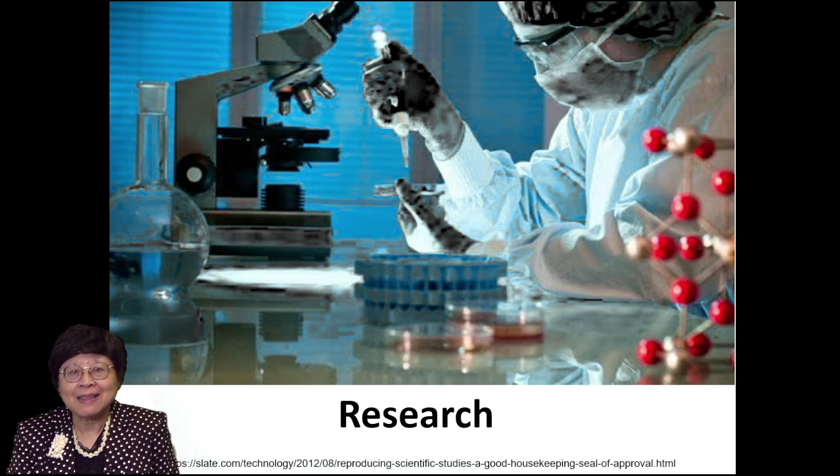I was also the very first woman engineering graduate. I got interested in integrated circuits, and I studied under Professor Carver Mead, the father of very large-scale integrated circuits. However, I did research under Professor Duwez, the father of amorphous metals, and that was my very first taste of research.

Research is not merely finding out existing knowledge, but creating knowledge so as to advance human civilization. Materials in particular can be very pretty, with a lot of applications such as electronics, aerospace, biomedical, as well as construction sectors. Materials actually constitute the foundation of any technology, electronics, aerospace, automobile, and whatnot. Materials also mark the history of human civilization, starting with the Stone Age, Bronze Age, Iron Age.

It's really exciting to be driving on the road of human civilization - not in the back seat, but in the driver's seat. After graduation from Caltech, I moved on to MIT for my graduate work, and I got interested in graphite.

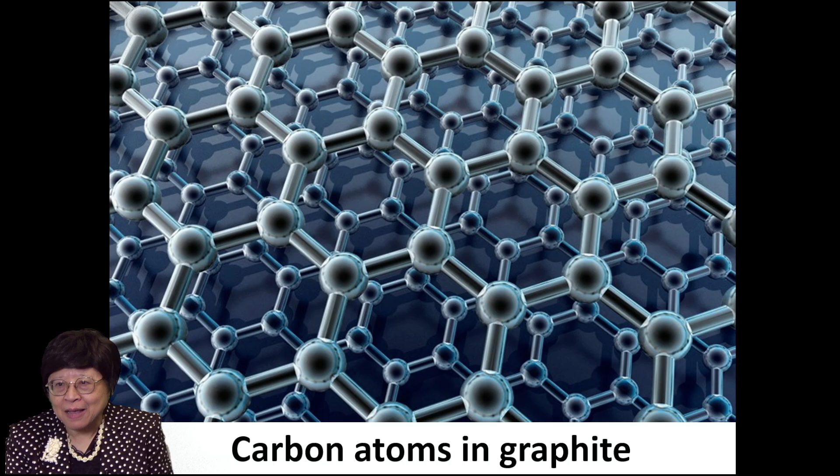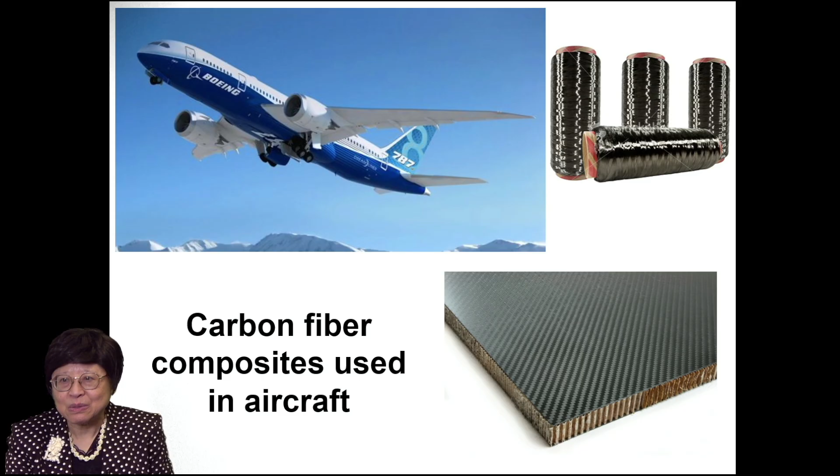There's a beautiful arrangement of carbon atoms in graphite, with applications in batteries and in aerospace, such as carbon fiber. Carbon fiber composites are widely used for aircraft because they are lightweight as well as strong. I studied under Professor Millie Dresselhaus, a very prominent carbon scientist.

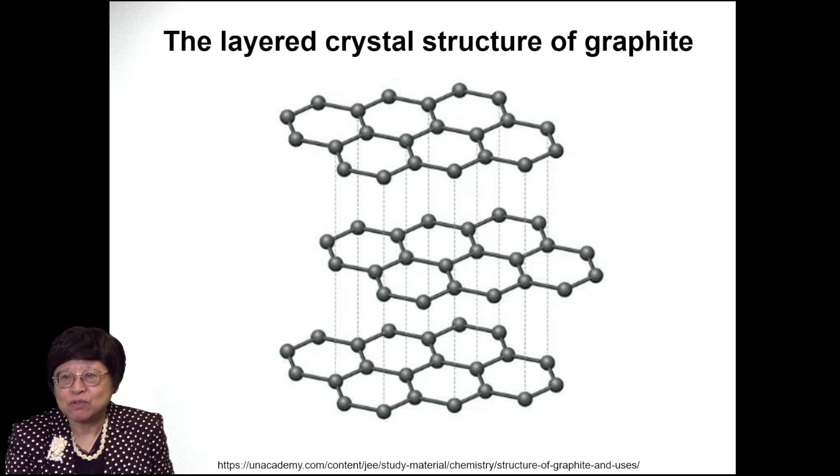She was a solid-state physicist, and we decided to study the reaction of graphite with certain strong chemicals so that the strong chemicals go in between the graphite layers, making a sandwich compound called an intercalation compound. In so doing, the graphite becomes a metal. It's very interesting, changing graphite to a metal through this process, which involves charge transfer.

I continued this line of research for 10 more years after graduation from MIT. I gradually saw the decline of my field of expertise because the applications did not quite work out at the time. So I decided to leave my field of expertise, but what to do? That's the big question. I was forced to think out of the box and leave my comfort zone.

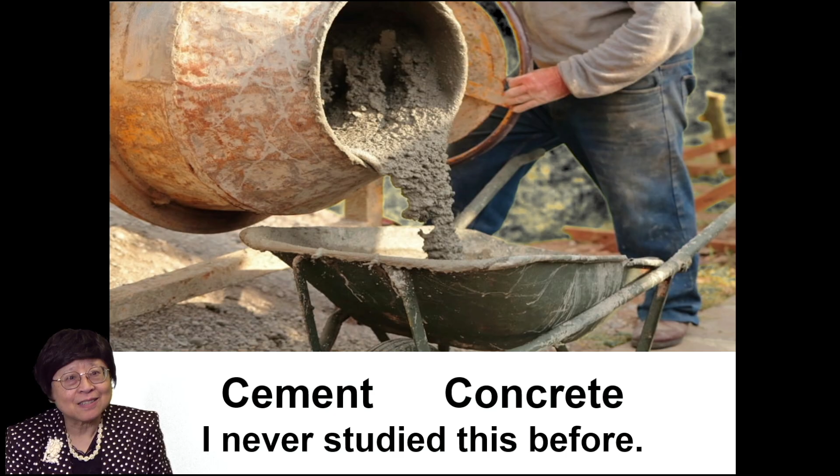I got interested in cement and concrete, something I never studied before. Because of my electrical background, I started studying concrete as if it's an electronic material. And thus, I invented smart concrete, which contains a little bit of short carbon fiber, which alters the electronic properties.

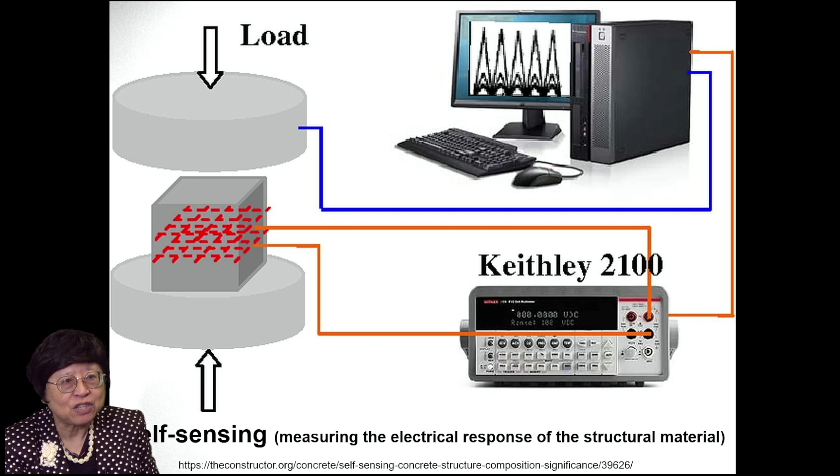The idea is that if you apply a load to the smart concrete, the electrical resistance changes. So by measuring the resistance, you can tell how much is the deformation, also the damage. This is known as self-sensing - the structural material sensing its own condition without the need for any sensor incorporation. This makes possible real-time monitoring, which is better than occasional monitoring.

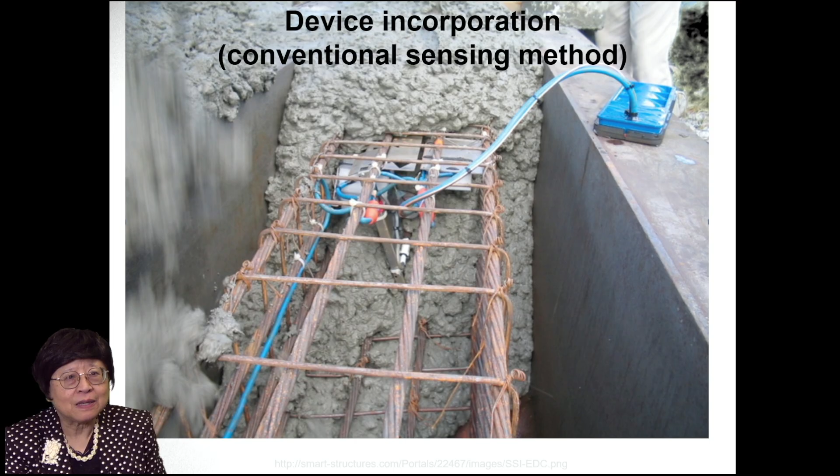Now, if one embeds a device like a sensor into concrete, it looks something like this. And if the device malfunctions, it'd be pretty hard to repair that. But without device incorporation, we have low cost, high durability, large sensing volume, and the mechanical performance not being compromised.

There are numerous applications, such as building intruder detection - that is, detecting the intruder because the intruder weighs something, so no camera is needed. Also weighing trucks as they move, and traffic monitoring, again because the vehicles weigh something. Autonomous vehicles need a lot of sensing, not just cameras and radars, but the infrastructure being able to help the sensing would be very nice.

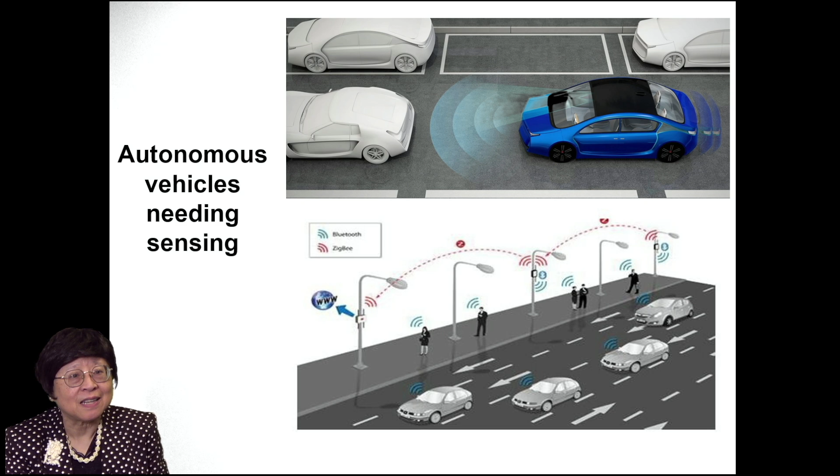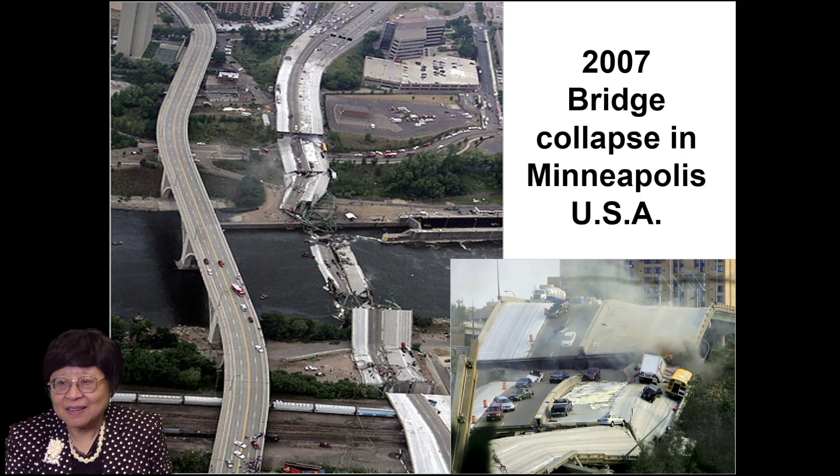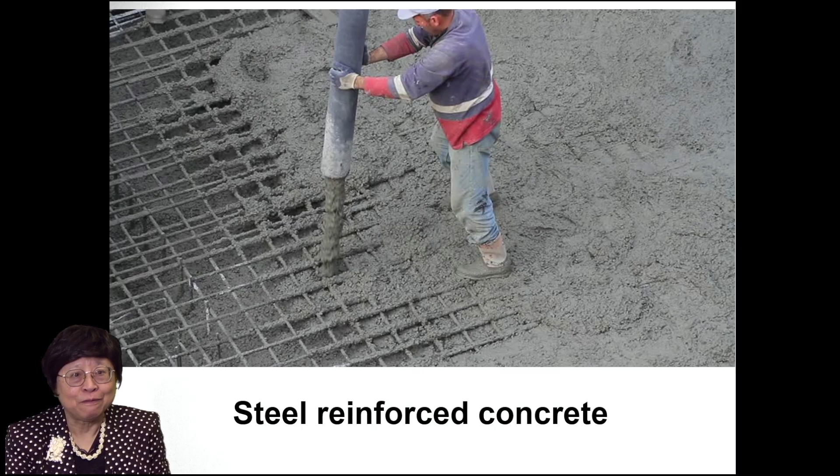All these structures were built using steel-reinforced concrete, seemingly a very matured technology, but in fact it's full of problems. Concrete has a structure which involves stones and sand acting as reinforcement, bound together by cement. This cementitious bond is not a very strong bond, so one needs to embed steel reinforcement in the concrete. However, the steel can get corroded, especially if the structure is near water.

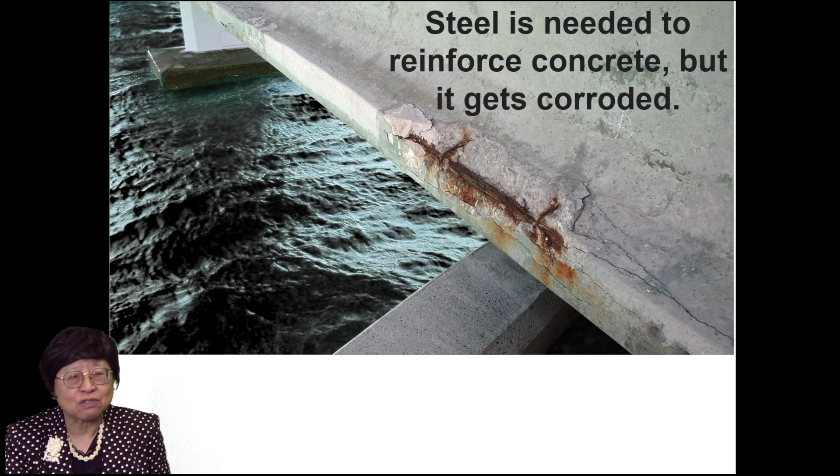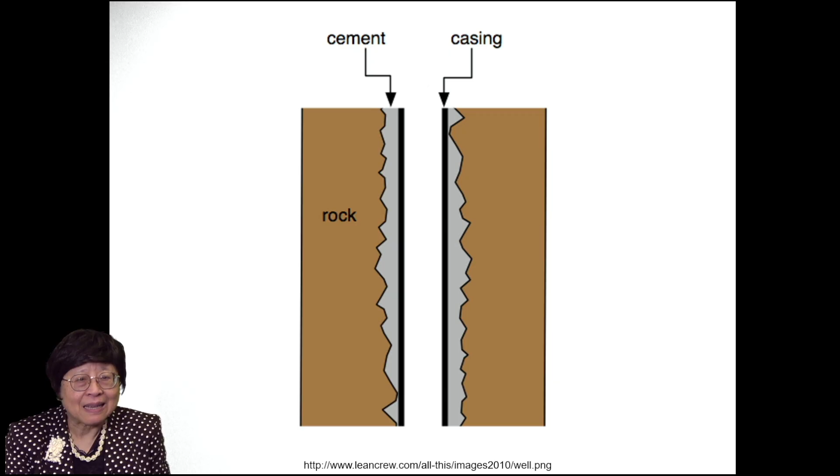And if the cement sealing goes bad, you can have leakage and oil spill, causing pollution as well as birds suffering. So it's a big deal, and it's important to be able to sense the condition of the structure.

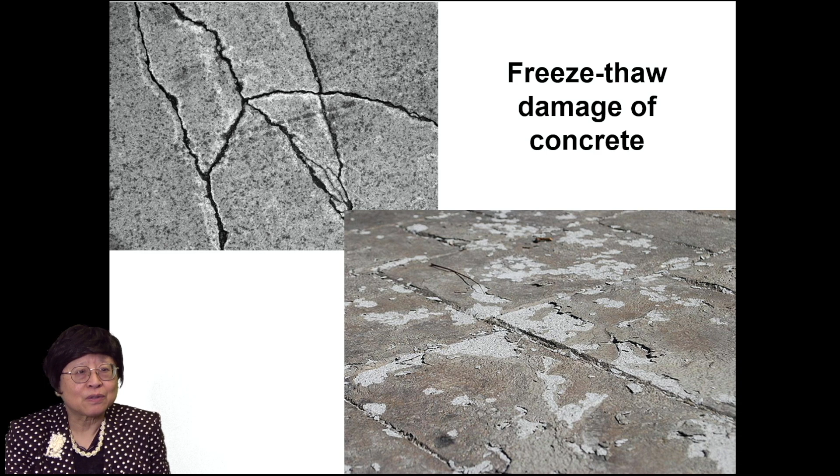Another cause of degradation of concrete structures is freeze-thaw damage. That is because water expands upon freezing, and there's water inside the concrete. So if you have multiple cycles of heat, freezing and thawing, it's like fatigue, and the concrete can degrade.

Shown here in thin line is the temperature, and the thick line is the resistance. Whenever the temperature increases, the resistance goes down, and that is simply because there are interfaces in the material, and increase in temperature would increase the thermal energy, making the jumping of electrons across the interfaces easier. So the cement-based material is a thermistor, a temperature measuring device.

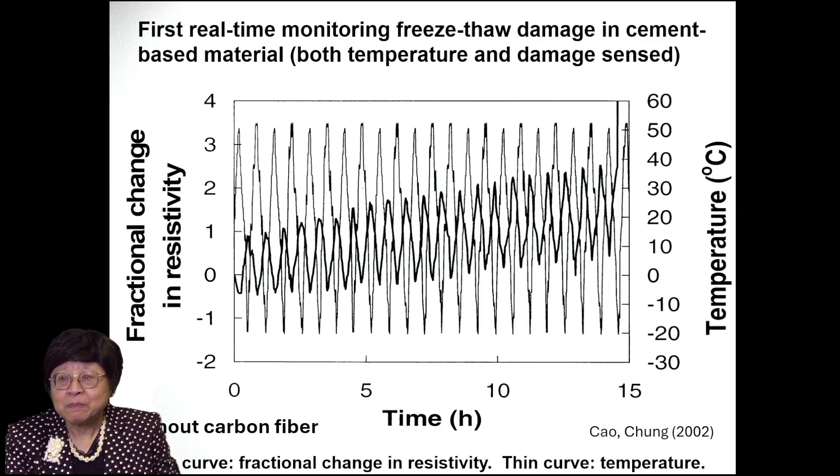But in addition, you see the upper envelope and the lower envelope increase as freeze-thaw continues, because there's minor incremental damage inflicted in every freeze-thaw cycle. Just at the end, when it dies, the resistance goes up to like infinity, and that occurs at the coldest point of the last cycle. This is the first real-time monitoring of freeze-thaw damage in cement-based materials.

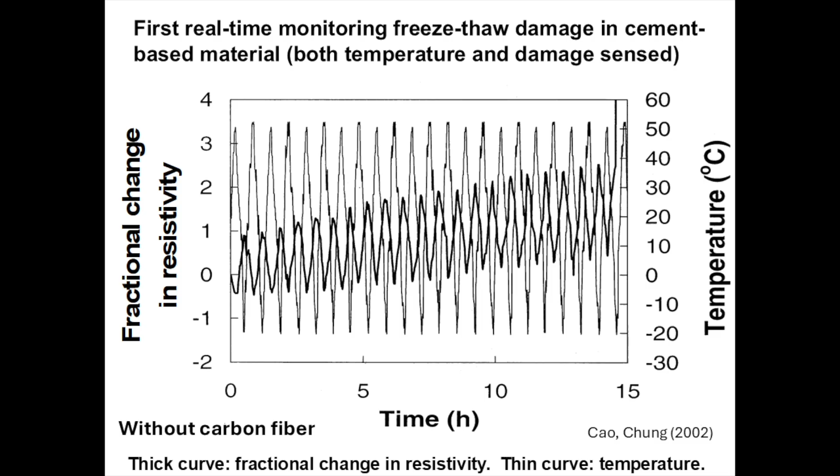I found it very fruitful to marry electrical engineering and civil engineering. Very few people join these two fields together, but I find this to be just my cup of tea.

Now, smart structures include civil structures, such as buildings and bridges and pipelines and so on. It'd be nice to be able to monitor the condition. Aircraft, same deal. One wants to make the aircraft smart, a bit like people.

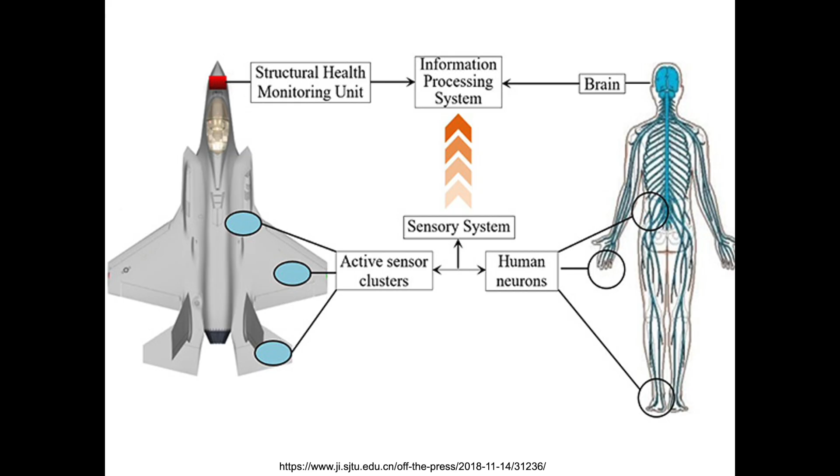A human being has nerves, and that's like sensors, and has a brain, which is like the computer. So the hope is that we get structures to be a bit more intelligent, although not quite as intelligent as human beings. Now, continuous carbon fibers look like this, commercially available.

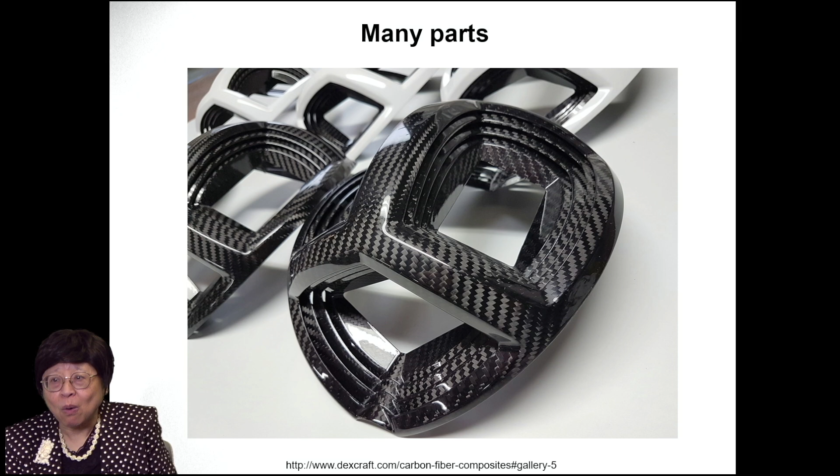They are widely used for aircraft, also for cars and for bicycles, for wind turbine blades, for robot arms, for golf clubs, for tennis rackets, for fishing poles, and for many parts, and also for retrofitting concrete structures.

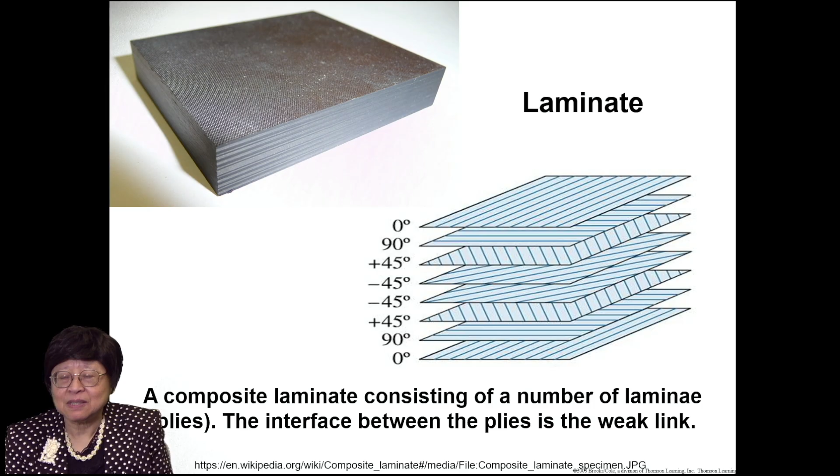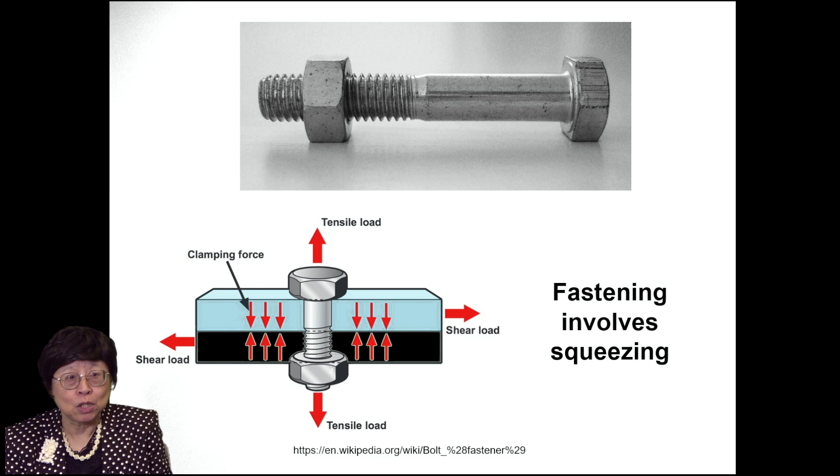One would know that. Now, the carbon fibers in a composite are never perfectly straight. They're always a little bit wavy. As a result of the waviness, the conductivity in the vertical or through-thickness direction is never zero, even though the matrix polymer may be insulating.

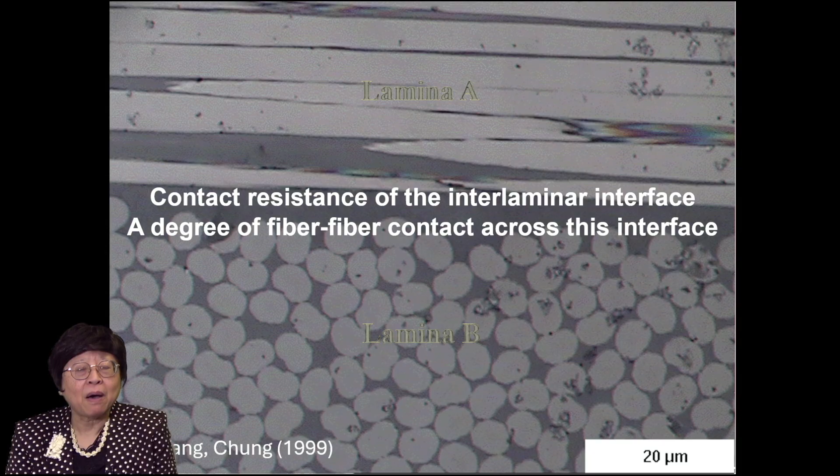And so there's always a degree of fiber-fiber contact across the interlaminar interface, and so the contact resistance of that interface is never infinity. The contact resistance would go up upon delamination. And so this is the contact resistivity versus time during stress variation as shown in the bottom curve.

And the upper curve is the contact resistivity. Every time one squeezes, the contact resistivity goes down, and that is because one is increasing the proximity between the fibers of the adjacent laminae.

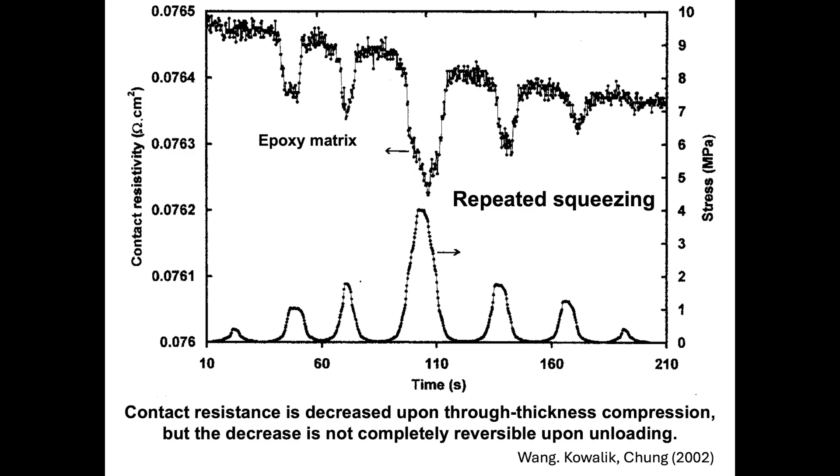However, note that upon unloading, the resistivity doesn't return all the way back. That means there is some degree of irreversible microstructural change. Could be very, very minor damage.

However, if we replace this very conventional epoxy matrix with a thermoplastic matrix, such as nylon, upon unloading, the resistivity returns all the way back. That's very good, and it's because the thermoplastic, like nylon, has polymer chains that can slide easily with respect to one another, so it's pretty tough or ductile. But for the epoxy case, it's brittle because of the cross-linking between the chains.

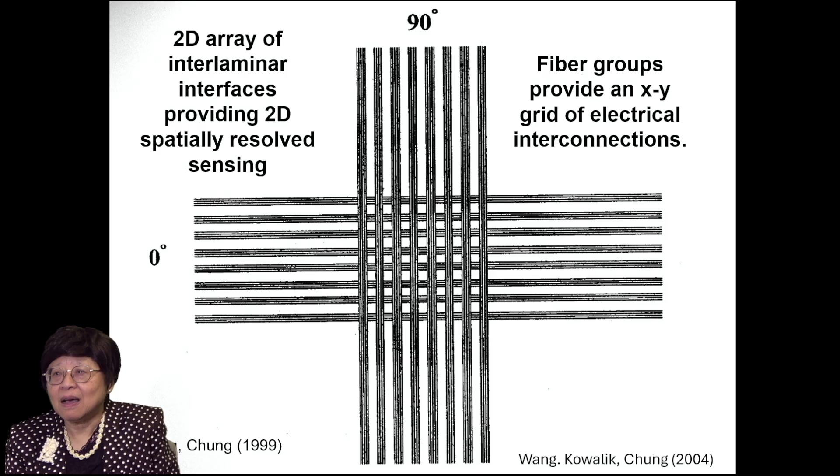Another nice thing about the interlaminar interface is that you can have an array of interfaces. Here you have fiber groups in X and Y, and you have a junction, so you have an array of junctions, meaning an array of sensors. Thus we can do 2D spatially resolved sensing. In addition, the fiber groups, in this case X and Y, provide a grid of electrical interconnections.

Now, robots also are smart structures, and you need sensing, actuation. So a lot of the concepts that I talk about are applicable to robots.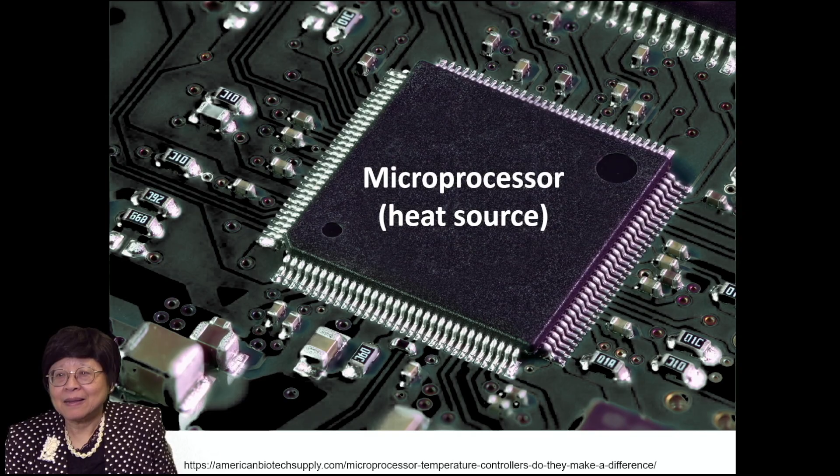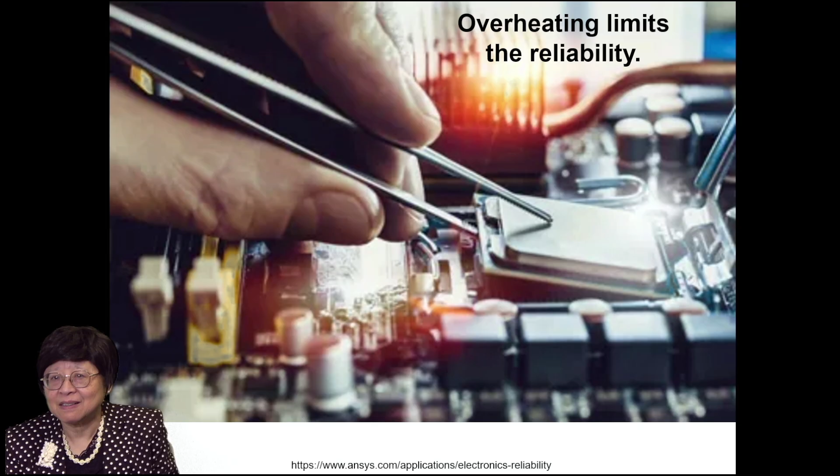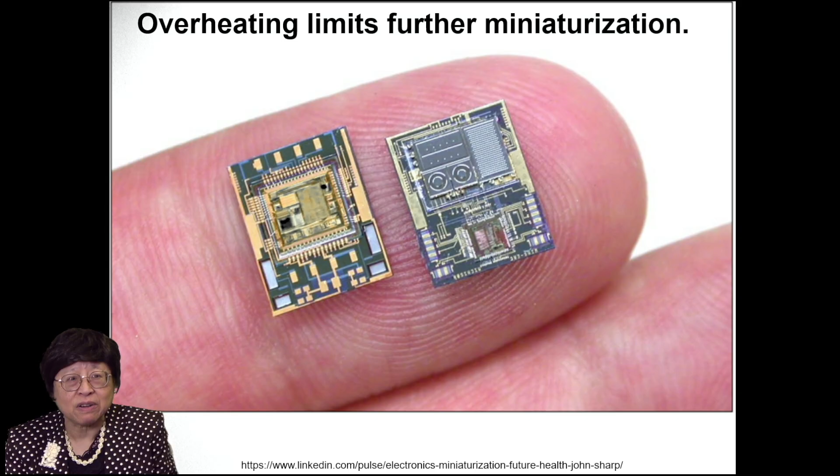I remain interested in electronics, and one of the biggest headaches in the electronic industry is overheating of microelectronics and cell phones. The microprocessor is the heat source, and if it goes bad due to overheating, you might need to replace the chip, so it's a reliability problem. Overheating also limits further miniaturization, because the smaller it is, the more concentrated the heat, and it limits electric power, because the more wattage, the more heating. So we must get heat dissipated.

We use the heat sink, obviously, but the thermal contact between the heat sink and the microprocessor can be a problem. If this thermal contact is not very good, you're not using the heat sink very well. So people put in a thin layer of thermal interface material at the interface to improve the thermal contact.

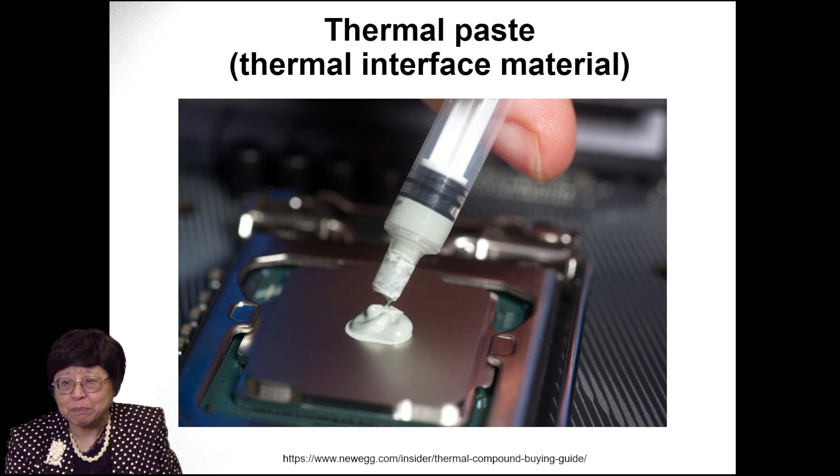This is an example of a thermal interface material, in the form of a paste called thermal paste. All along, people have been assuming that high thermal conductivity is the criterion governing the performance of a thermal interface material, but I figured out that it is not the only criterion. There's another criterion which is just as important.

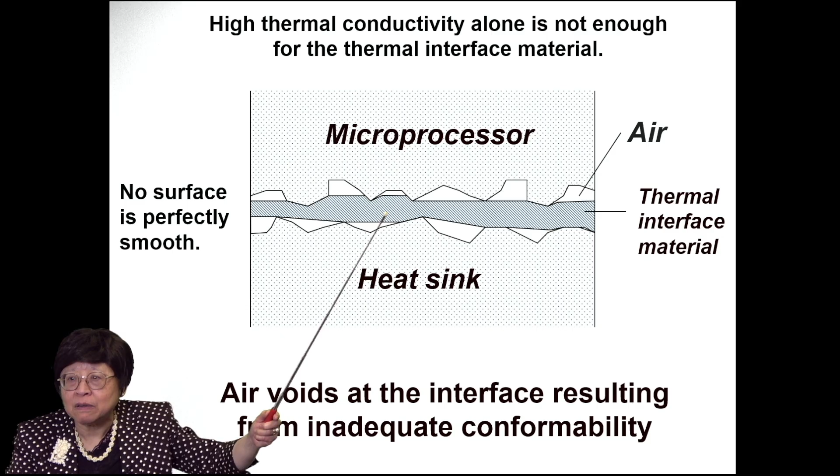No surface is perfectly smooth, so there are microscopic ups and downs, and air resides in those microscopic valleys, and air is a thermal insulator. So the thermal interface material has to be able to conform to these ups and downs to displace the air out. Conformability is crucial. Even if the thermal conductivity is very high, if the conformability is not good, that material is not going to function well as a thermal interface material.

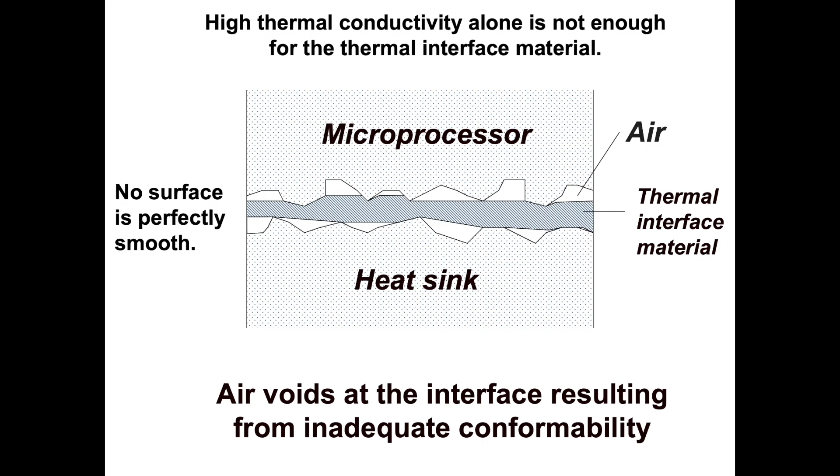Realizing that, and knowing that carbon black is itself a solid that is conformable, I ended up inventing carbon black thermal paste, which excels due to the conformability. Carbon black has a nanostructure involving aggregates of nanoparticles, like little filaments sticking out like an octopus, linked just by van der Waals forces. So when you compress it just a little bit, it's going to squish. It's squishable, and because of the squishability, it's very conformable, even in the solid state.

So I put forth this new concept and brought forth a paradigm shift in the design of thermal interface material. Used to be just thermal conductivity. Now there's a paradigm shift so that the conformability is just as important.

Let me now switch to shielding, electromagnetic shielding, mainly in the radio wave and microwave regime, because such waves can interfere with computers. So we need to shield computers and other electronics, and also to shield the radiation source, such as cell phones. Metals are widely used for shielding because they are high in conductivity, and the high conductivity promotes shielding by reflection.

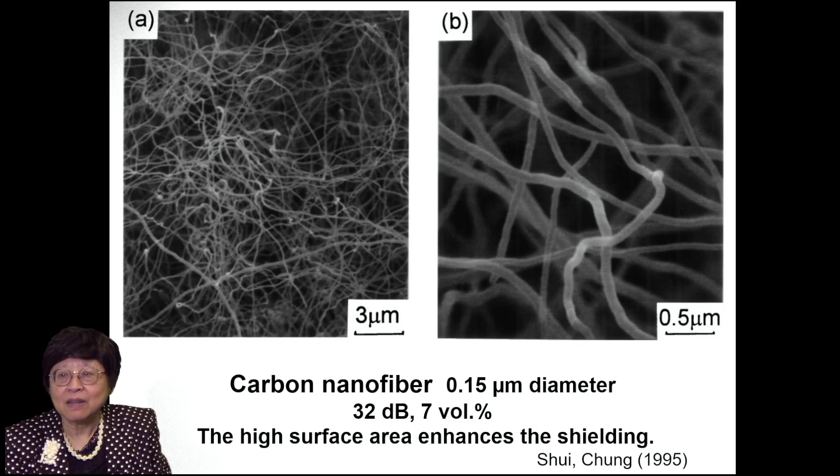But we can improve this further by depositing nickel onto the carbon nanofiber. The nickel is a metal, so it's very conductive, and also it's magnetic. This is a low mag and high mag view of the nickel-coated carbon nanofiber, which we reported back in 1995, and it's still among the very best fillers for EMI shielding.

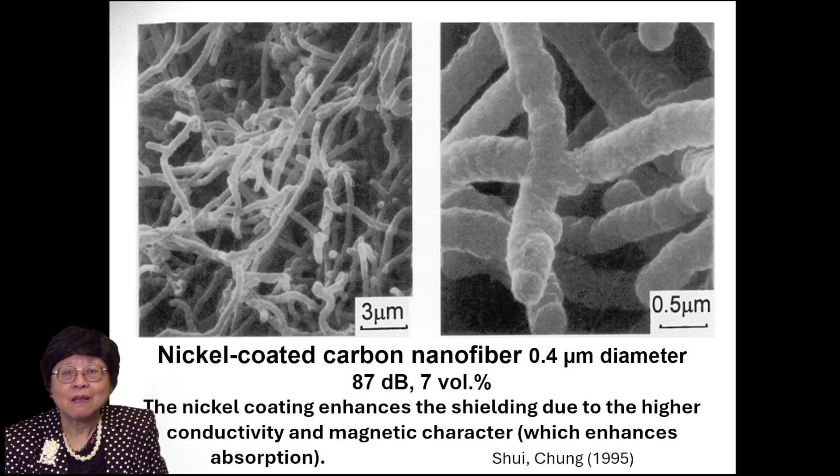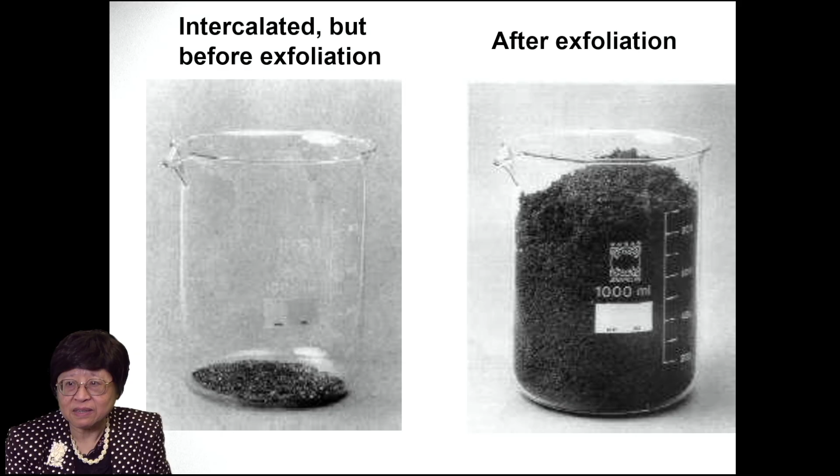If we have a pile of these worms and compact this pile, because of the cellular structure of each worm, there is mechanical interlocking among these worms. So it forms a sheet without any binder, all graphite. This sheet is flexible, so it's called flexible graphite. We discovered a long time ago that this material is superb for shielding, 129 dB of shielding, which is the highest you can measure.

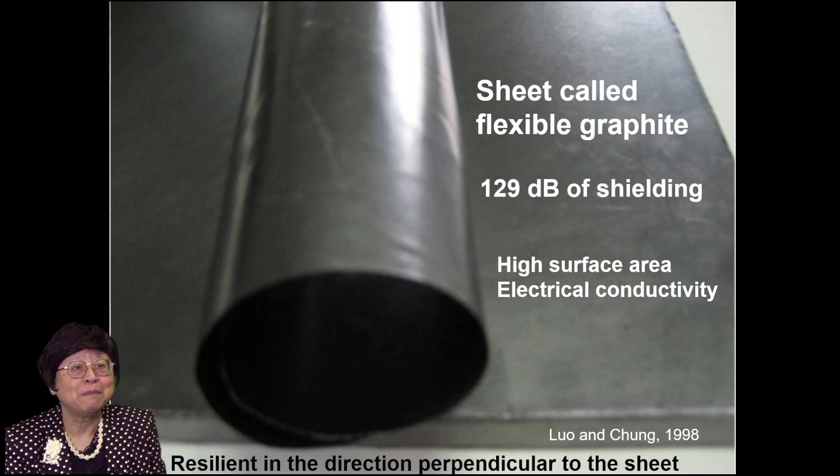So we brought about a paradigm shift in the design of EMI shielding materials. It used to be just electrical conductivity as the only criterion. But now we realize that there's a second criterion: surface or interface area being high can help a lot.

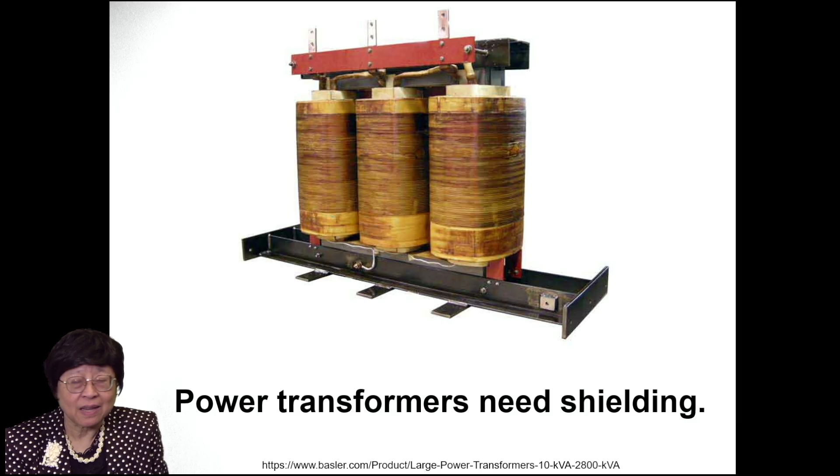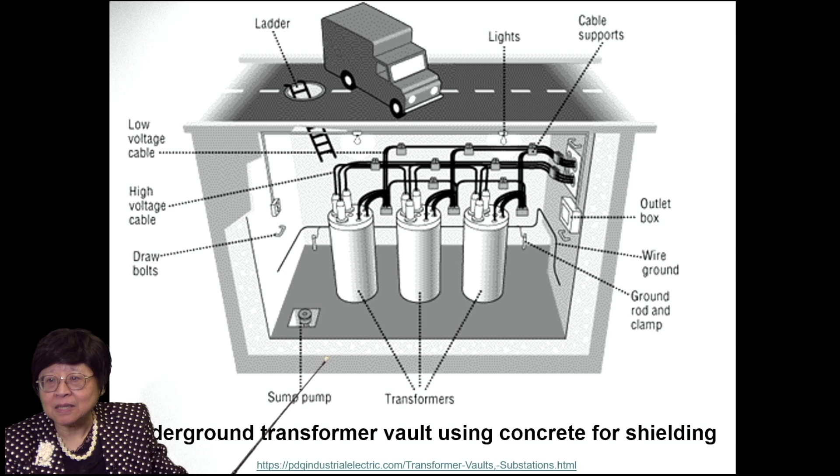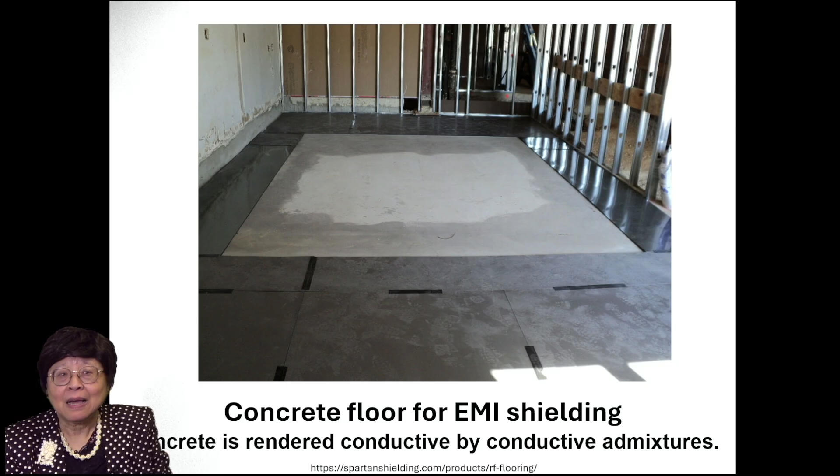Power transformers need shielding. Any electronics need shielding, and big power transformers are underneath the road and contained in a concrete vault. This is inside the vault, so we would benefit from concrete that can do shielding. Concrete itself is not effective for shielding, but we can throw in some conductive additive called admixtures into the concrete mix to make the concrete conductive and thereby be able to shield.

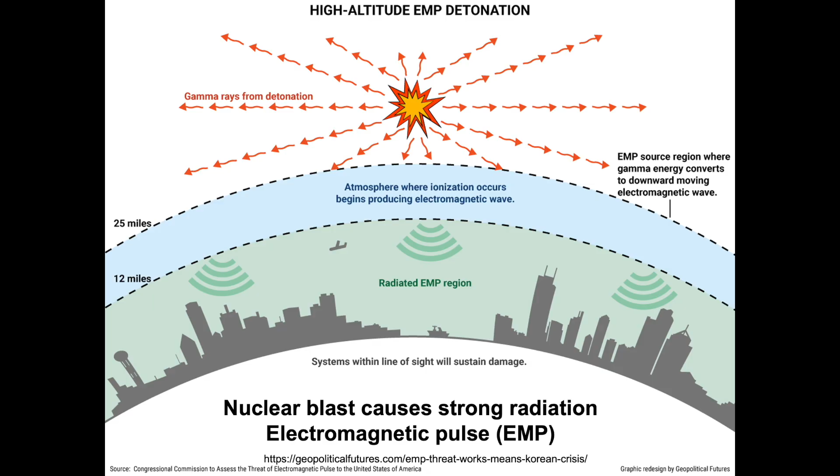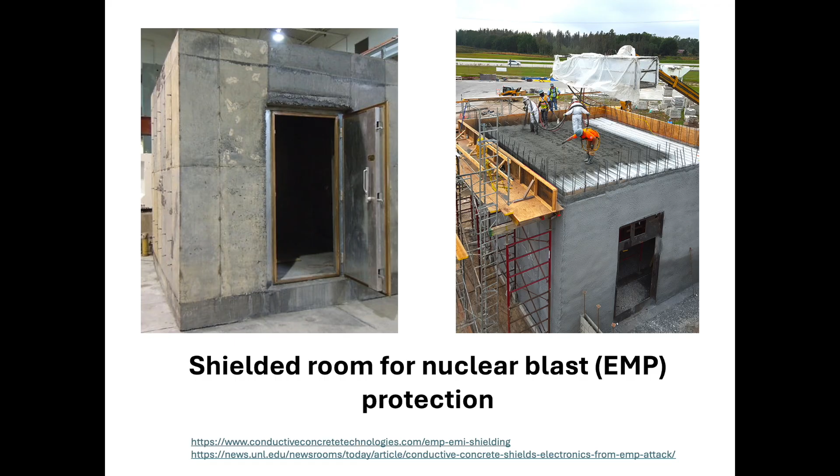It's not only for protecting electronics, it's also protecting everybody in case there's a nuclear blast at high altitude. That blast can give off very strong radiation that reaches the whole of the United States. It's a very big deal. They call it EMP, or electromagnetic pulse. So people have buildings like this to protect against EMP, and the concept is just like shielding.

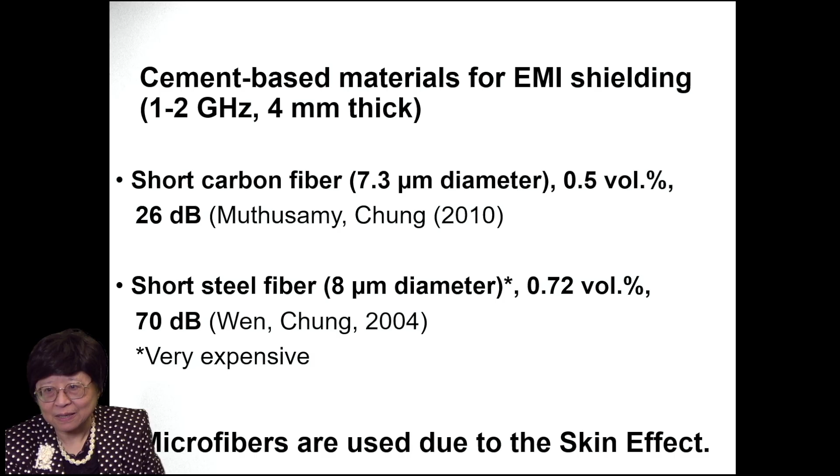Short carbon fiber inside the cement-based material gives 26 dB. But if one goes with short steel fiber, it's a lot better, 70 dB, because steel is a metal, very much conductive, and also has some magnetic character. But note that both are microfibers. That's important. If it's nano, it's even better. But these are micros, and if one uses macro fibers, it would not be effective. Microfibers are used because of the skin effect.

Another application is automatic highway. We'd like to have automatic steering. One way to get that is to pave along the traffic lane of the highway, say the middle part being radio wave reflecting concrete, and the rest being ordinary concrete. Each car should have a transmitter and a receiver of radio wave, so if the car sways to the side, it would know that.

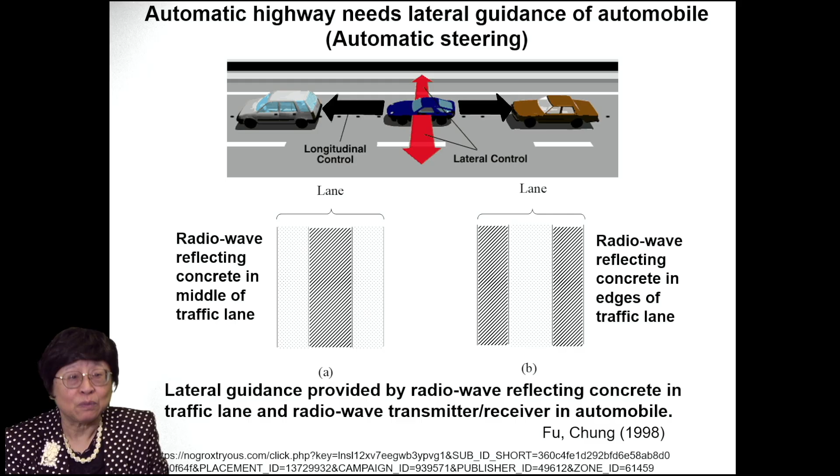I have a wonderful time marrying microwave engineering and material science, and this is a marriage that is not usual. Microwave engineers don't tend to look into material development, and materials people don't tend to touch microwave, but to me, that's my cup of tea.

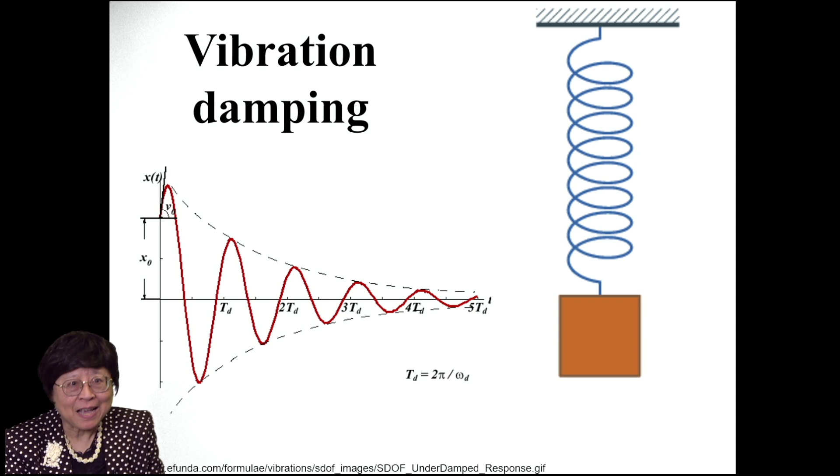Another topic that's dear to my heart is vibration damping. We'd like a structure not to vibrate. Just being able to bear load is not enough, you'd like it not to vibrate.

Bridges need vibration damping, high-rise buildings do also, and railroads need vibration damping as well as sound absorption. Sound is a pressure wave. Aircraft also need noise reduction, and satellites obviously need vibration damping.

Viscoelastic behavior of materials is the key to vibration damping, like ketchup and rubber band. The idea is that, say you have rubber, and inside the rubber there are long molecules. When you deform the rubber, there's motion of these long molecules, and that motion consumes mechanical energy, thereby reducing the vibration.

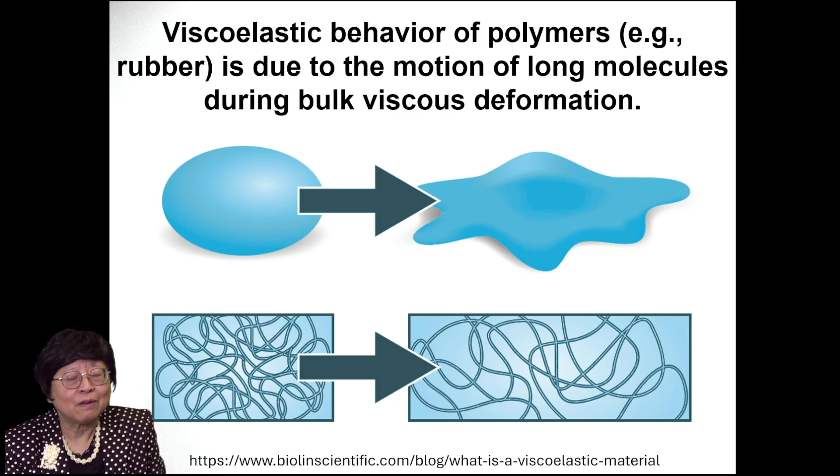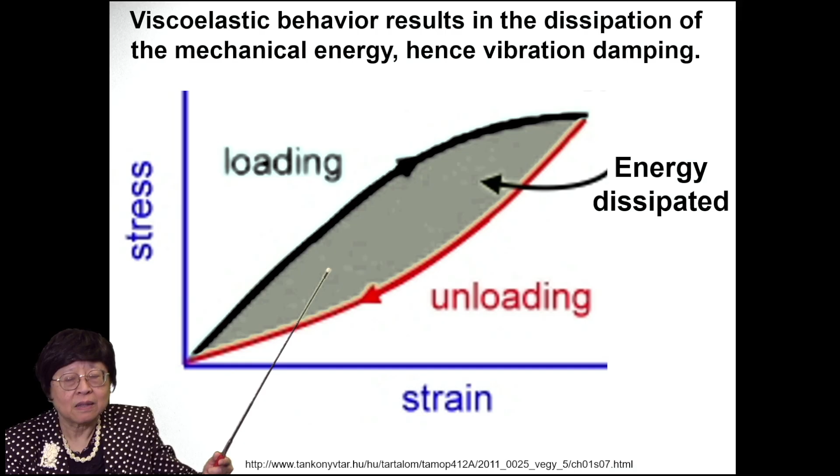The stress-strain curve upon loading doesn't overlap that during subsequent unloading, so there is energy dissipation. The bigger this hysteresis loop is, the better. This is viscoelastic behavior.

Polymers like rubber are well known and utilized a lot for vibration damping, but there are serious disadvantages because they are low in stiffness, low in strength, and also poor in durability. Rubber bands cease to be elastic after maybe a month or two, okay?

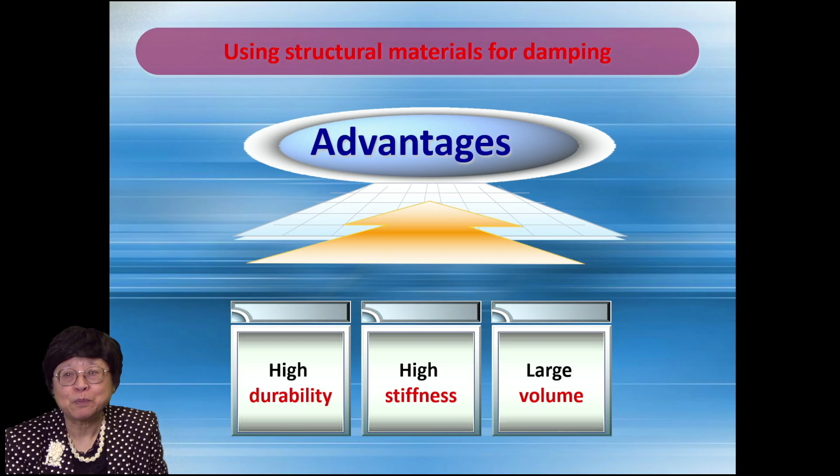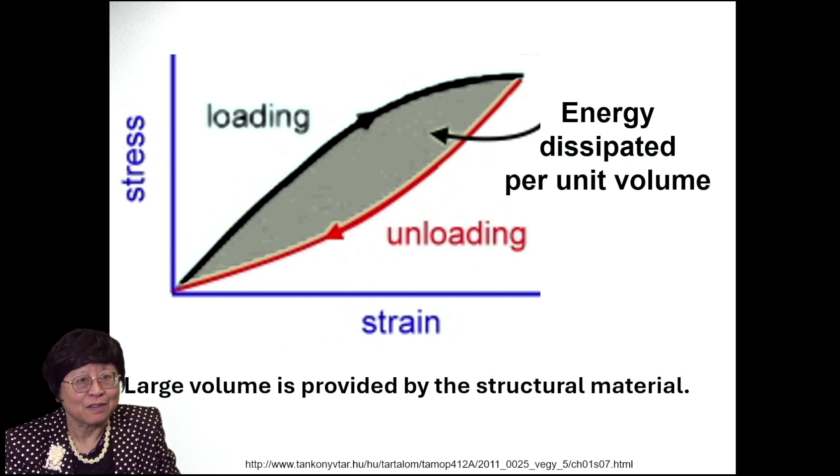However, my dream is revolutionary: using structural material for vibration damping. It's something nobody has ever thought about. The advantages are high durability, high stiffness, and large volume. The large volume helps a lot because this hysteretic area is the energy dissipated per unit volume. So if you have a big volume, it means a lot of energy dissipated, and the structure is big.

And I had to devise a different mechanism of viscoelasticity. The usual mechanism exhibited by rubber is not good enough, and the mechanism I devised involves slight slippage at the filler matrix interface.

I don't mean loosening the interface, it's just very slight reversible slippage during the vibration, and there's friction involved. So this slight slippage consumes some mechanical energy, thereby providing mechanical vibration damping. This I call interface-derived viscoelasticity. It is not due to the bulk viscous deformation that rubber provides.

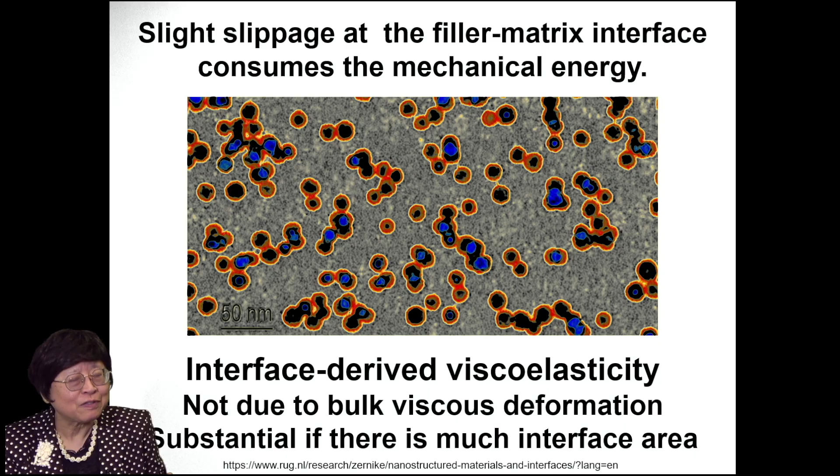But for this interface-derived viscoelasticity to be substantial, there must be a lot of interface. A lot of interface can be realized if one uses nanofiller. So I use nanofiller in the form of silica fume, silica particles, and put that into a cement matrix to form a composite, and because it's nanoparticles, you have a lot of interface.

And that's it, it makes possible this interface-derived viscoelasticity. In addition, the nanoparticles serve as reinforcement. So I'm stiffening the material in addition to making it better in damping. Improving both stiffness and damping, that's revolutionary.

People could not believe me when I reported that back in 1998, because people have rubber in mind. If you have a type of rubber that is stiffer, it's going to be less good for damping. You gain one and lose the other. But here, I gain both.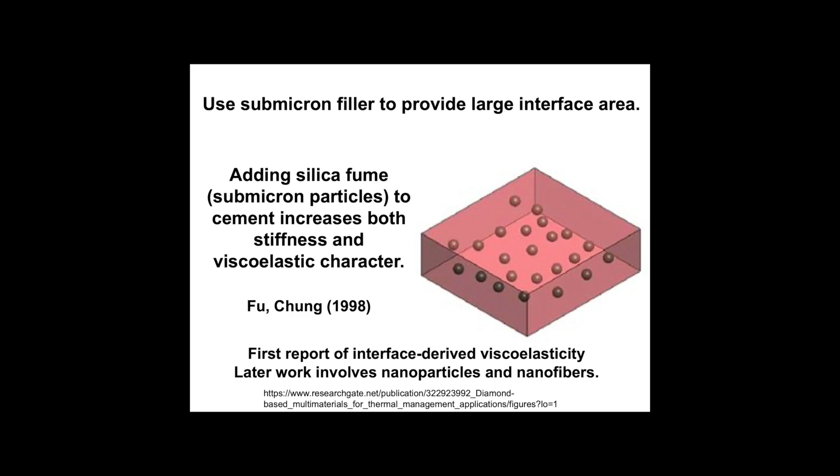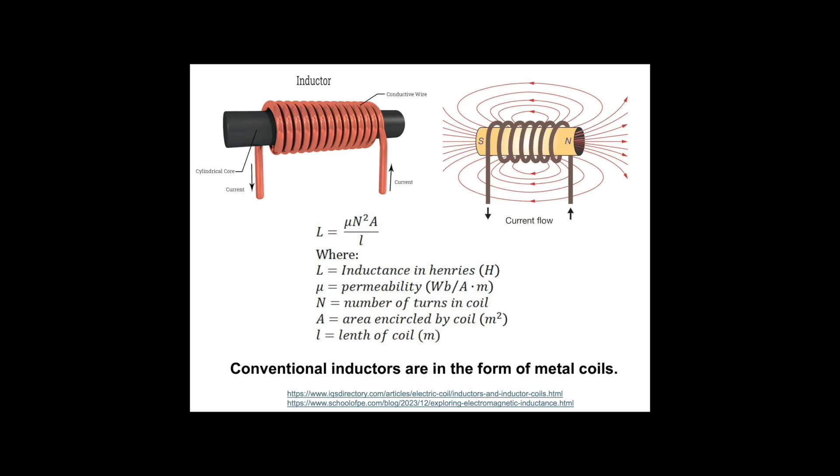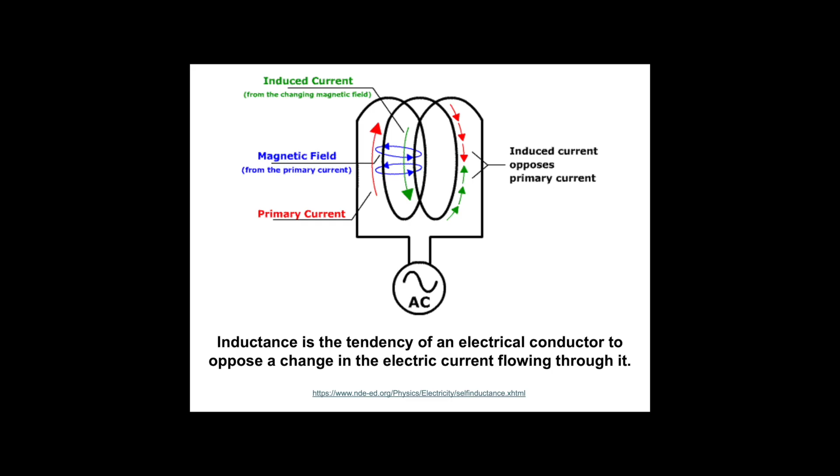Inductors are conventionally in the form of metal coils. Inductance is the tendency of an electrical conductor to oppose a change in the electric current flowing through it. Inductors are used in electronic circuits, also in power transformers, in electric generators, and electric motors.

Almost 100% of electrical energy in the world is produced by generators, and motors consume about 65% of the electricity.

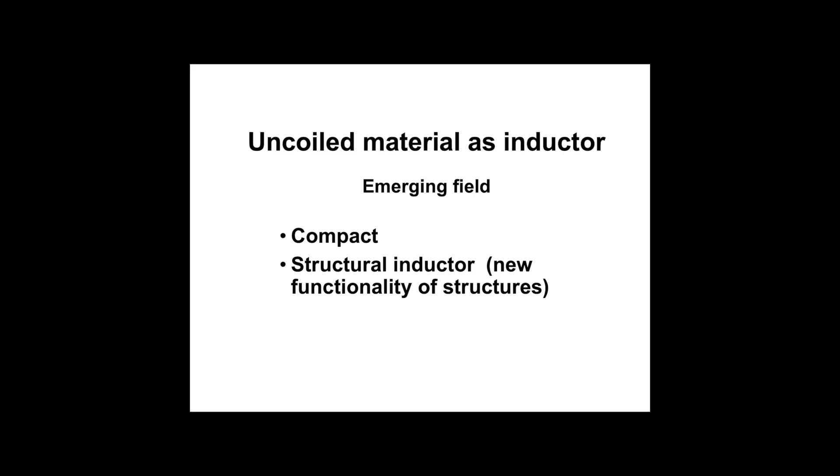And what I'm interested in is not those coils, rather uncoiled materials as inductors. This is an emerging field of science. It's good to have no coiling because that would make it more compact, and it can allow structures to do the job. And so I call it structural inductor, and that's a new functionality, a new level of smartness for structures.

And the inductance reaches 0.4 millihenry with just a short length of the carbon fiber. Now, millihenry is actually a pretty high inductance.

Permittivity is another kind of electrical property. Electric cars need batteries, okay, and the batteries take up volume as well as weight, and limit the payload and increase the fuel need.

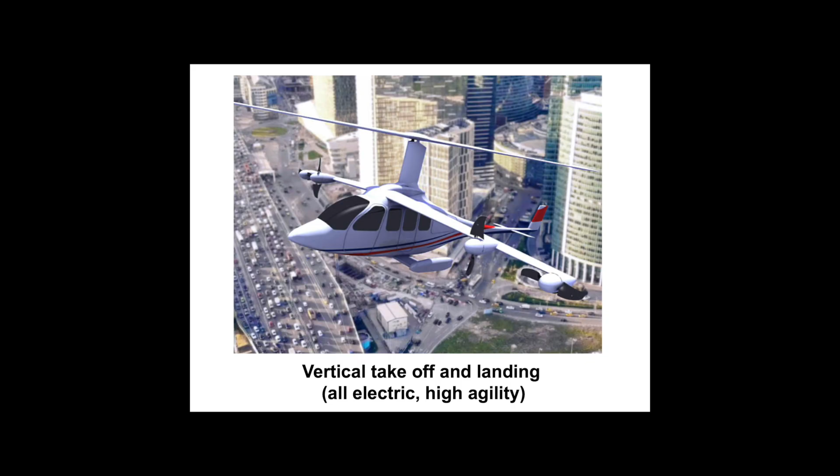The aircraft in the form of vertical takeoff and landing is all electric, needs high agility, and it's supposed to act like an air taxi traveling within the town, and so it needs to be quiet, and therefore has to be all electric, and this demands the energy tremendously.

So structural battery or structural capacitor means making a structure provide the battery or capacitor form of energy function. And the idea is not embedding a battery, not embedding a capacitor, but rather modifying the structural composite so that it can do the job.

I was the first one to report on that back in 2001, but I was not very excited about this because this modification, even though it's not embedding a battery or embedding a capacitor, it requires modification of the composite, and the modification weakens the mechanical behavior of the composite. And you must maintain the mechanical property of a structural material.

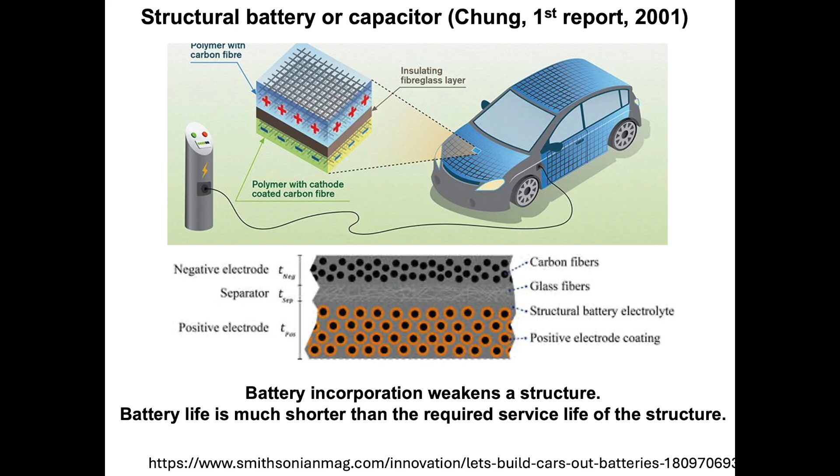And also, the service life of the battery function or the capacitor function is a lot shorter than the service life that's expected for that structure. So recently I looked into a different route, altogether a different approach. And I call that structural permittivity, that is, structures providing permittivity-based functions, including energy function.

Permittivity relates to the polarizability, separating the positive and negative charge centers. And permittivity has been very much studied for decades for insulators, such as polymers and ceramics.

One can measure the capacitance and the permittivity, and as a result the capacitance, which relates to the permittivity, would be affected if there's a defect in the material.

So we use capacitance-based defect self-sensing in 3D printed polymer, which is not conductive. We had 7 dots representing 7 artificial defects placed at certain positions between certain layers. We measured the capacitance using these 2 electrical contacts, and we were able to figure out the number of defects—is it 1, is it 7—and also between which layer the defect is located.

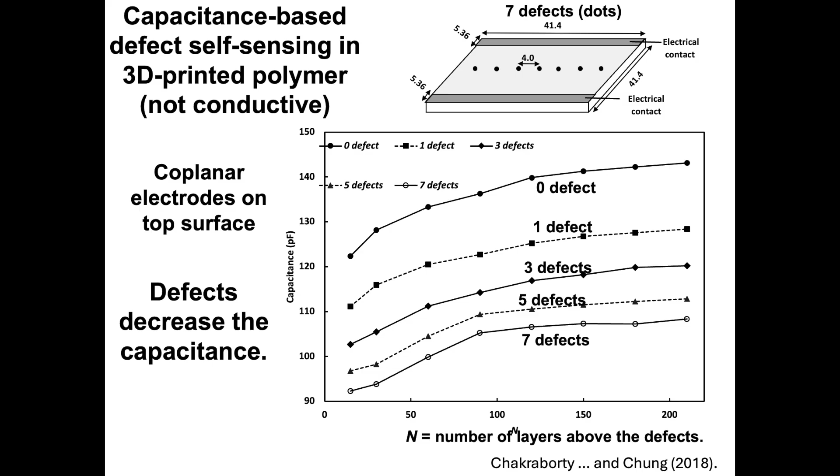However, recently we made a very revolutionary step, which is to extend the permittivity or capacitance concept from insulators to conductors. Sounds crazy, but actually, after a lot of literature research, we found that Jonscher, back in 1999, predicted by theory that in high conductivity materials, the permittivity can be as high as 10 to the 8. Unfortunately, he passed away 6 years after the prediction.

And 20 years after the prediction, that is 2019, I made the first experimental observation of such huge permittivity in conductors, such as metals and carbons.

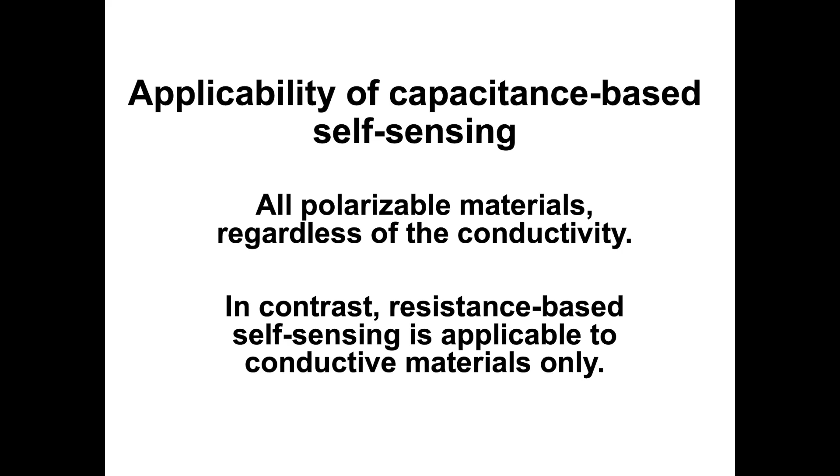Concerning capacitance-based self-sensing, we can apply that to both conductors and insulators, as long as the material is polarizable. In contrast, resistance-based self-sensing, which was what I did involving smart concrete, is applicable to conductive materials only. So capacitance-based self-sensing is actually more broadly applicable than resistance-based self-sensing.

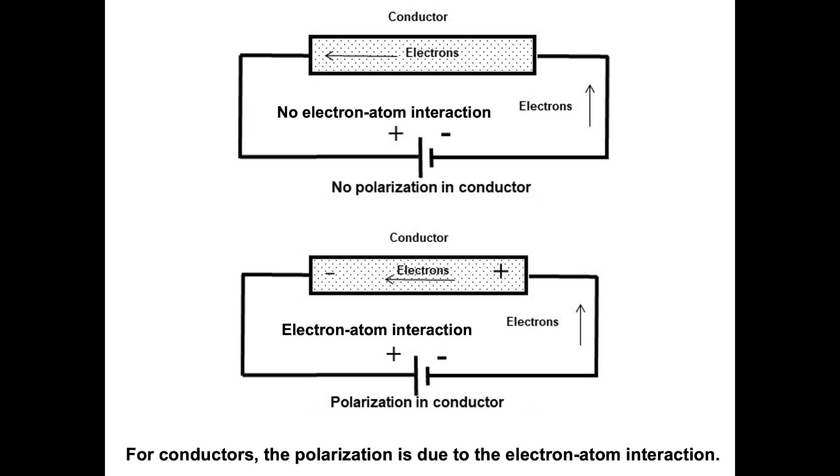But how can a conductor like a metal be able to provide polarization? If there is no electron-atom interaction, then the electrons just loop around the circuit and no polarization occurs. But if a small fraction of the mobile electrons interact with the atoms, then you can have polarization. And that is the mechanism which we found to be indeed the case, the electron-atom interaction.

This interaction we further found to be mainly occurring at the microstructural heterogeneities, such as grain boundaries. So rolling, the mechanical rolling for instance, would increase the permittivity because it refines the microstructure. Polarization involves engagement of the carrier-atom interaction, the carrier referring to the mobile charges, and depolarization under reverse polarity involves disengagement of this interaction.

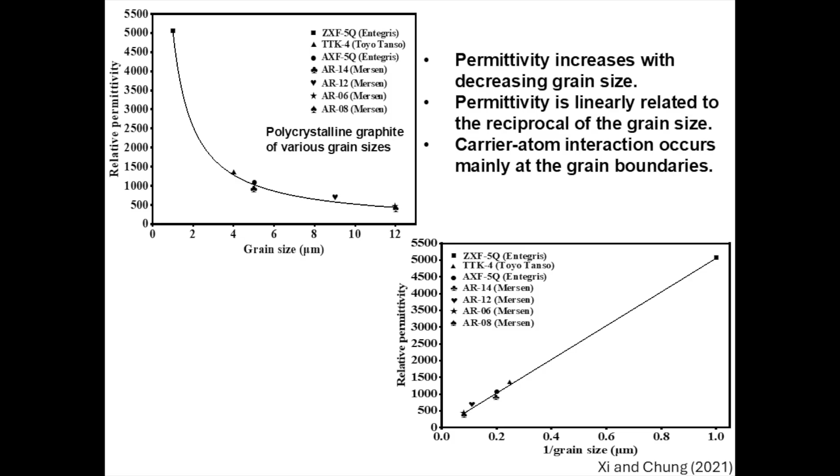We varied the grain size of polycrystalline graphite, and indeed, the smaller the grain size, the higher the permittivity. If we plot that versus one over grain size, we get a linear plot indicating that it's the grain boundaries that matter in this carrier-atom interaction that's responsible for the permittivity.

The poling is required in order for ceramics and polymers to be polarized. Large structures cannot be poled anyway because it's too large—the voltage required to give a particular electric field would be huge. So structures cannot be poled anyway. Polymers and ceramics, these insulators, require poling.

But then if you short circuit the single fiber, the two ends, it would discharge, with the capacitance going down. Afterward, if you just open circuit it, it would self-charge. That is, it charges on its own, just sitting there open circuited. So it's self-charge. This is really revolutionary, self-charge.

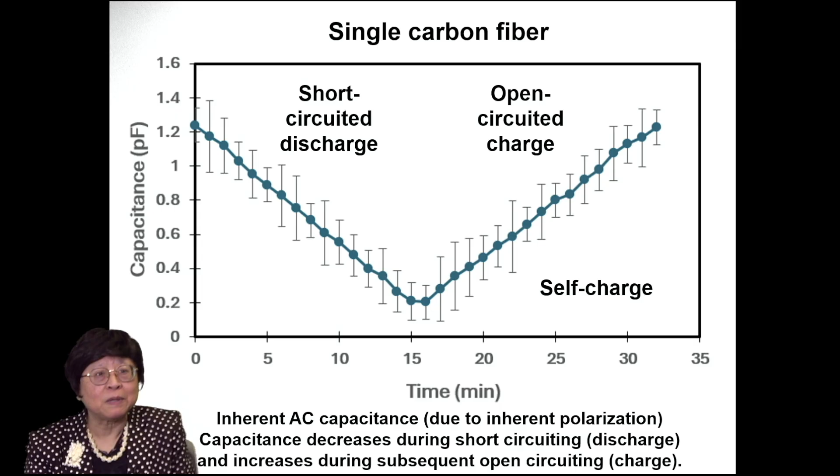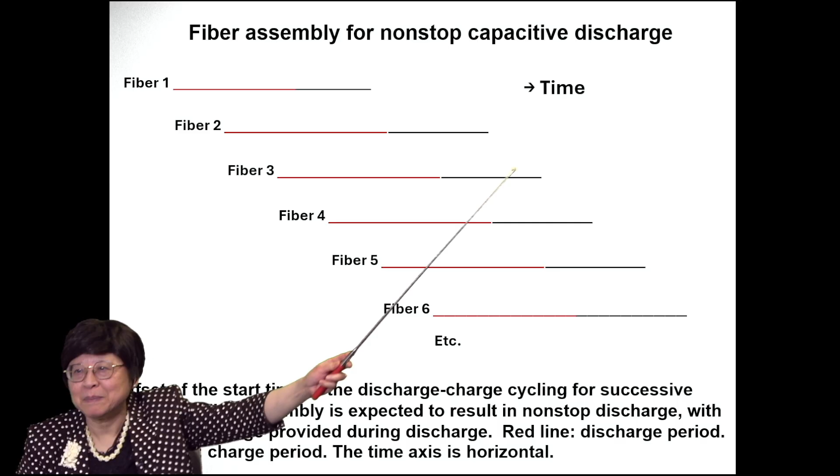When you have this assembly of fibers, then you have continuous discharge, a continuous rendition of energy. This is perhaps our newest dream, and still a lot of work that needs to be done. Note that the time is increasing to the right in this picture.

This brings me to the concept of structural energy, a term that I devised, referring to energy generated by structures. Structural materials include metals and carbons. It can be viewed as a new untapped form of energy. There's no energy storage needed because energy is generated continuously, and no greenhouse gas emission, obviously.

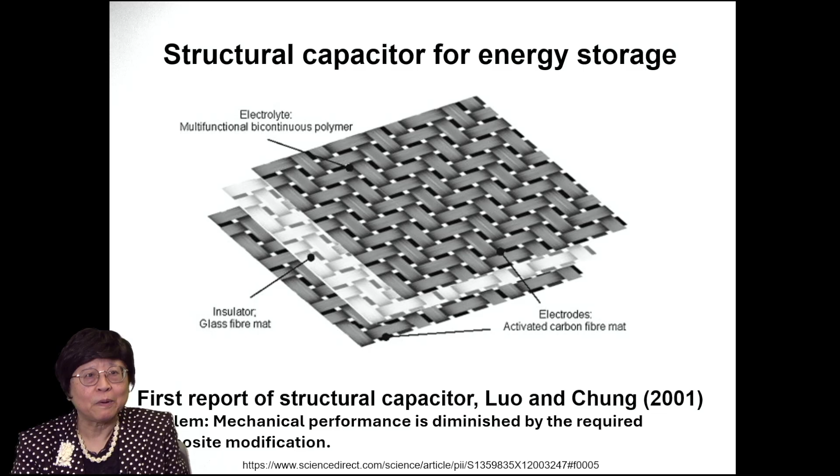I said it already that I was the one that reported for the first time the structural capacitor. But I was not very happy with this because the structural performance is diminished due to the modification required. Now this is a totally different approach—it's not modifying the composite, it's utilizing the single carbon fiber assembly and offsetting the start of the discharge for each fiber, letting each fiber discharge and then self-charge. In this way, we provide continuous discharge.

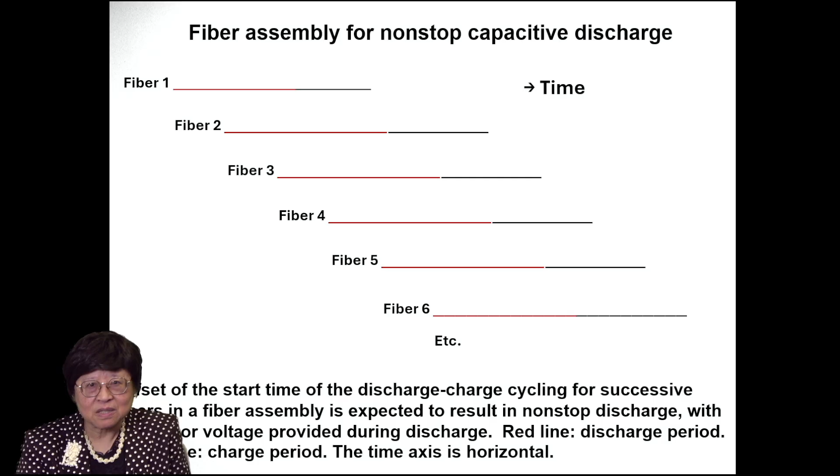The scope of my research includes structural self-sensing, structural permittivity, structural inductance, structural energy, thermal interface materials, EMI shielding materials, and interface-derived viscoelasticity.

What I want in my heart is not just an incremental advance. I want a transformative advance, and transformative science opens a new horizon. I want to be a leader, not just a follower. But creativity is so, so important—thinking out of the box and being able to jump out of one's comfort zone, very important. And having a broad education helps that a great deal. I really cherish the broad basic science education that Caltech provided me.

IQ, we all want that, but EQ is emotional quotient—that is the ability to continue to go ahead in spite of difficulties. SQ is spiritual quotient—that is knowing what you're living for, what's the meaning of life. We need all three Qs to help us succeed in life.

Thank you so much for sharing my fun. I really thank Caltech for the Distinguished Alumni Award in 2025. This is so dear to me that my alma mater would recognize me. I also want to thank my former PhD thesis advisor, Professor Millie Dresselhaus, who mentored me very, very well. Thank you.